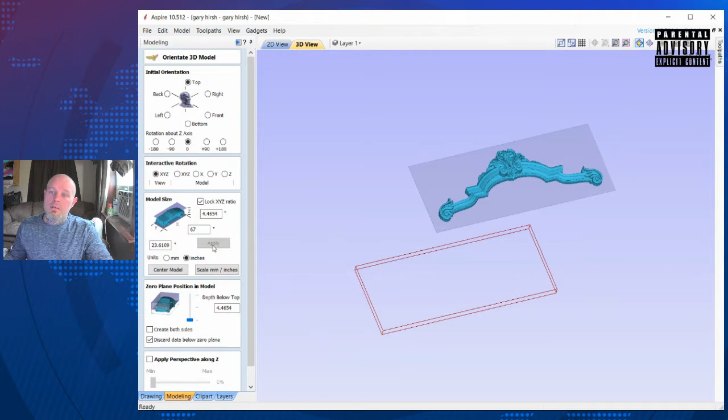For me, I'm going here, I'm going to the door topper. This is actually going to double as the bed topper also on the headboard to tie the room together. So right now it's very big. We're going to go to 5 inches on 5 inches overall, so 67 inches wide. Okay, we're going to center the model. We're going to bring the model completely to the surface, and we're going to click OK. All right. So everything looks pretty good.

Some things to remember with this: I'll be using larger tooling and longer tooling. So I'll have a 1/4 inch 2-flute ball nose end mill that cuts 4.5 inches. The cut depth is 4.5 inches on it. So I'll be able to get down into these design areas more so than what most will. I have an ER20 spindle on my CNC for Newbies 4896 machine, which is what I'll be cutting this on.

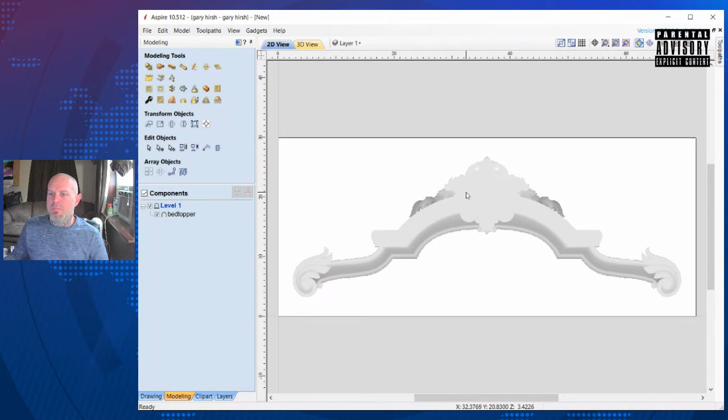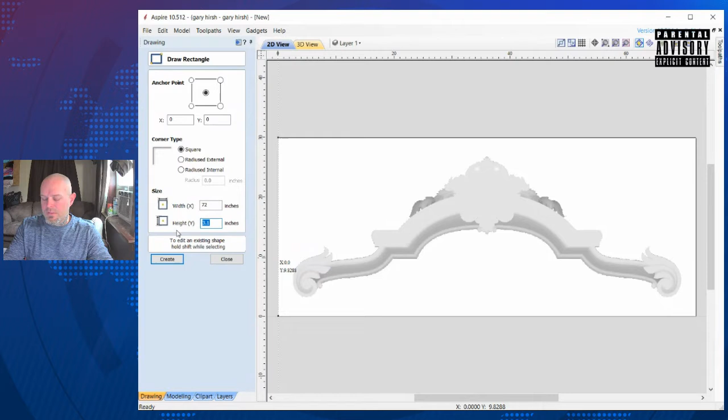So that's that. Okay, so we have our design here. I have it kind of mapped out where I want it. Now I'm going to go here and I'm going to start mapping parts out. So we can go to drawing, rectangle. We can go 0, 0. We'll go a width of 72 and a height of, let's say, 1.5. Create. Nope. We're going to undo that, and we're going to go there and create. Okay.

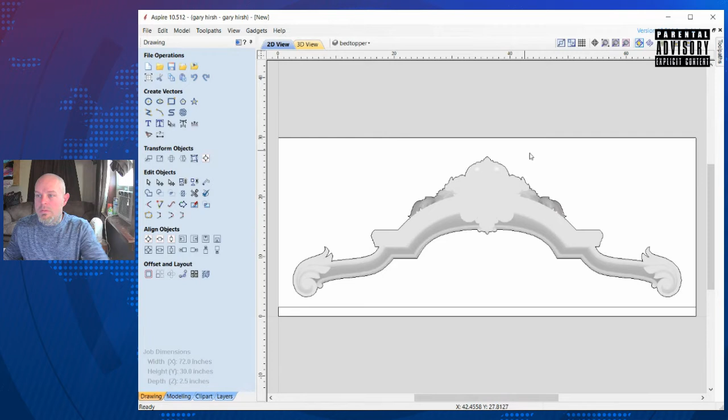Now, with this, I'm going to go back, and I'm actually going to create a vector boundary. Blank that out. We're going to go to drawing. I'm going to ungroup my drawing. Let me blank that out again. Oh. Delete. Delete. Okay. I have just the outside here, which is what I want.

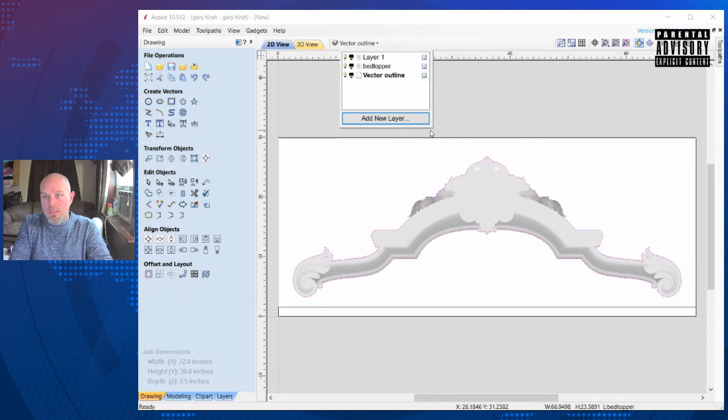Now I'm going to select that. I'm going to add a new layer. Vector outline. Okay. We're going to move to vector outline. Okay. There we go. We're going to rename this as wood blank. Okay. That's blanked out, and that's my vector outline.

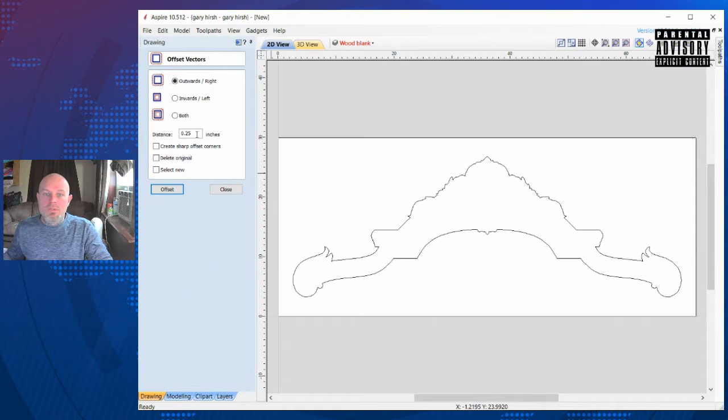So the next thing I want to do with this vector outline is I want to offset it. And I want to offset it outwards using 1/4 inch tooling. We're going to give ourselves a 1/4 inch with that 1/4 inch tooling. So we're going to offset that. Okay, that gives us a little bit of leeway with the tooling. And then I need leeway with the clamping. So I'm going to go 2.5 outwards, and I'm going to go 2.5 off of this one. Close. All right.

So I'm off over here, and I'm not too worried about that for the simple fact that this is no man's land. This is unused wood that I'm actually going to clamp to. Okay. Now I know I'm going to use 2x4s as my base. I'll actually probably use cut down 2x6s to get the depth that I want.

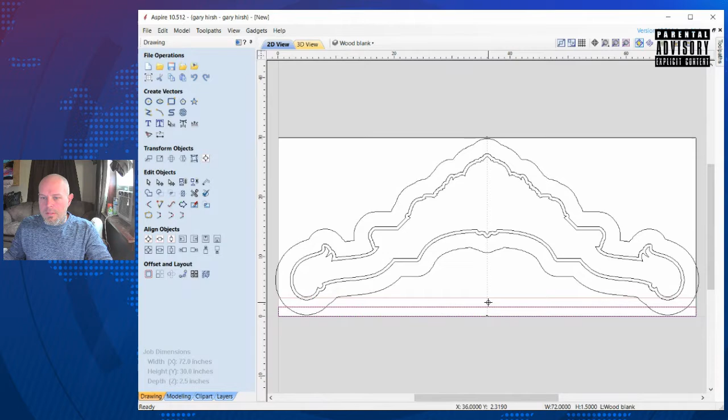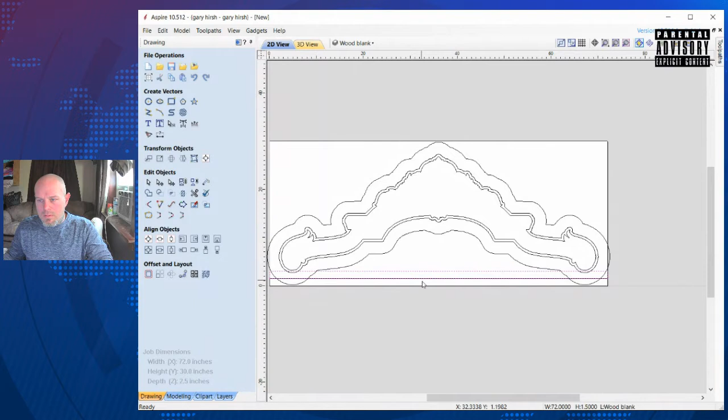So now I'll just go through and I'll move this there. And I'll just keep copying and I'll Control V. Control C, Control V. All right. And what I'm going to keep doing is building this up. And on each area, I'm basically just going to create a box. And I'll show you here in a second.

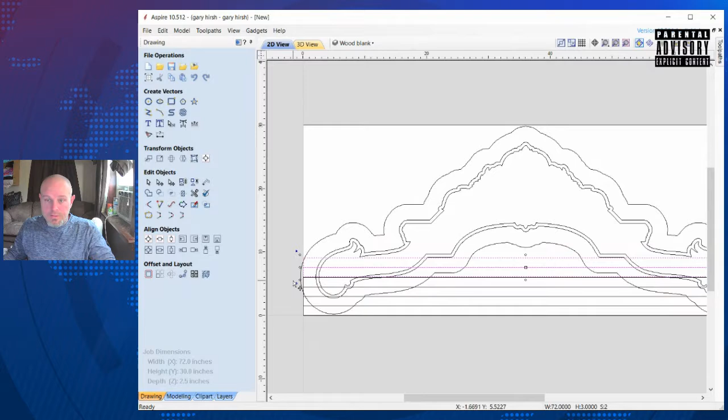All right. So these lines represent my wood that I'm actually going to glue up and surface.

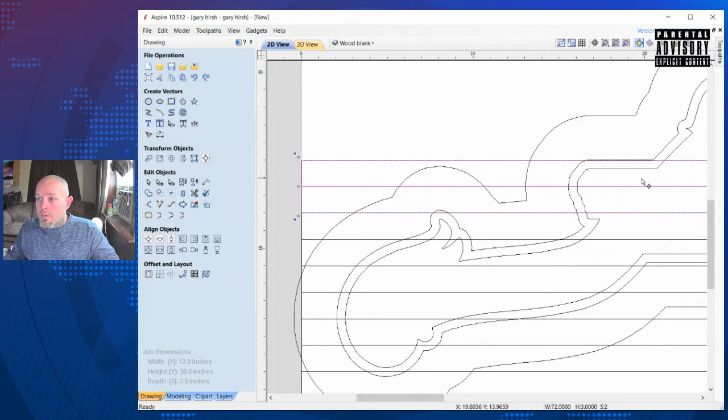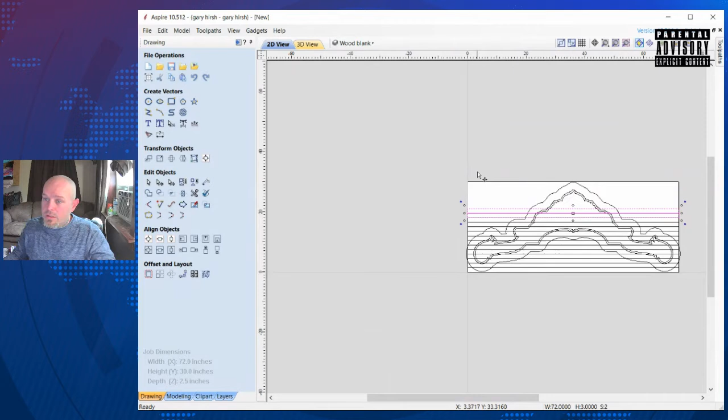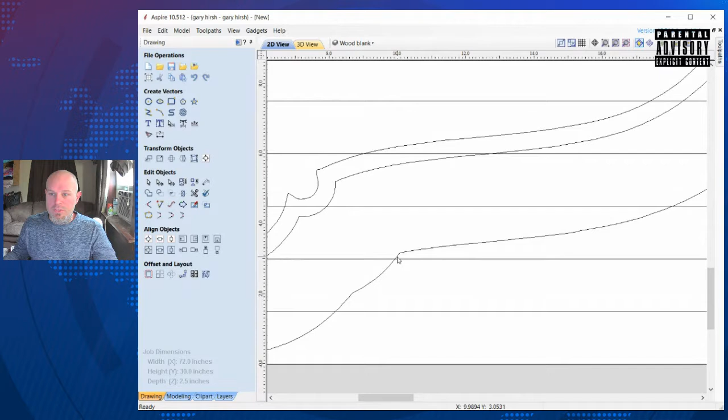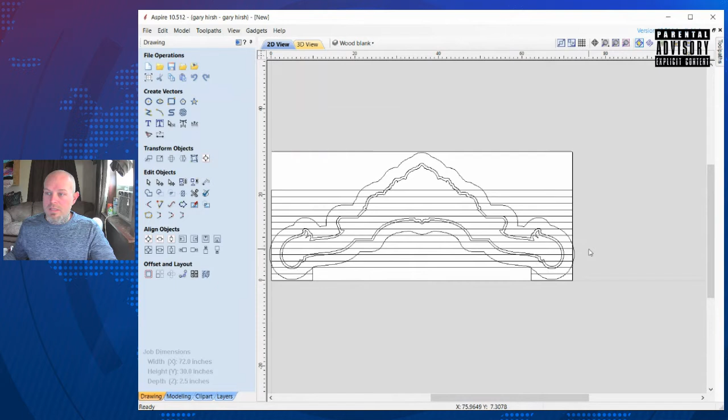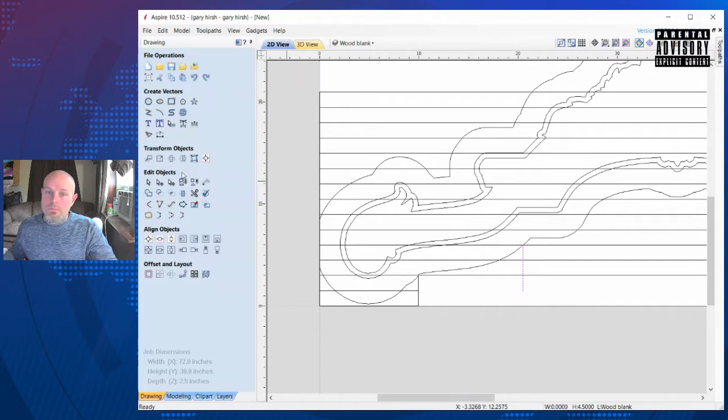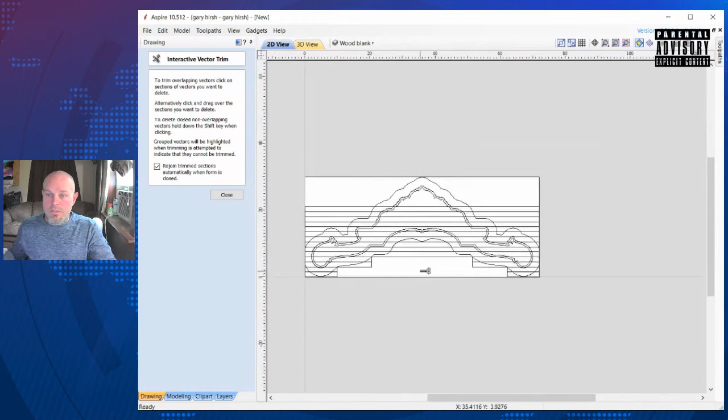And we now have those pieces there. And I'll go through and clip that. Clip that. Okay. Now I'll come down here. And I'll clip that. And I'll repeat over here. And this doesn't have to be real intricate. As you can see, I'm just kind of arbitrarily drawing lines. And I do them 2 stacks just because it's easier for me to keep track of. And I'll go through and clip that and clip that.

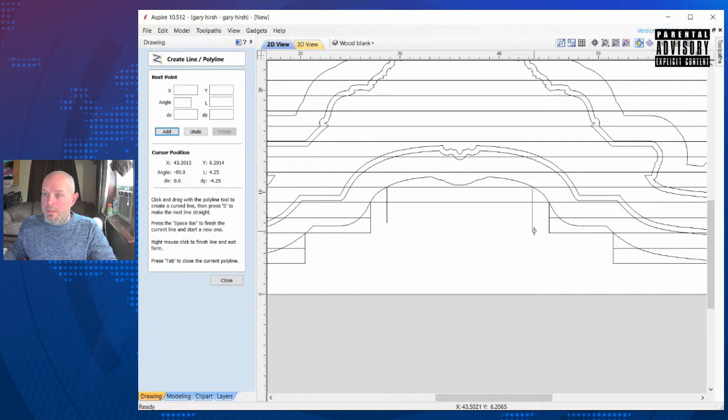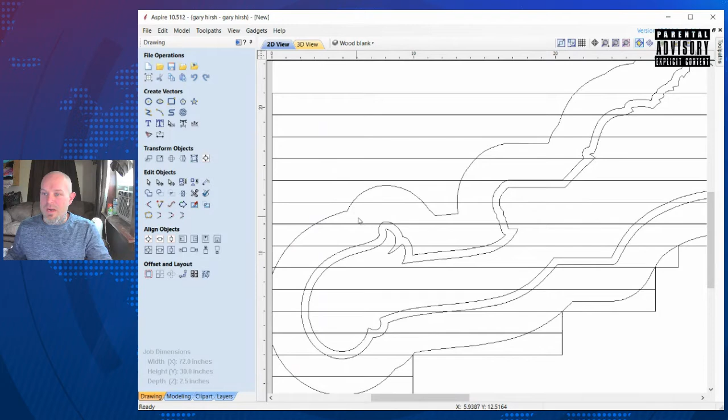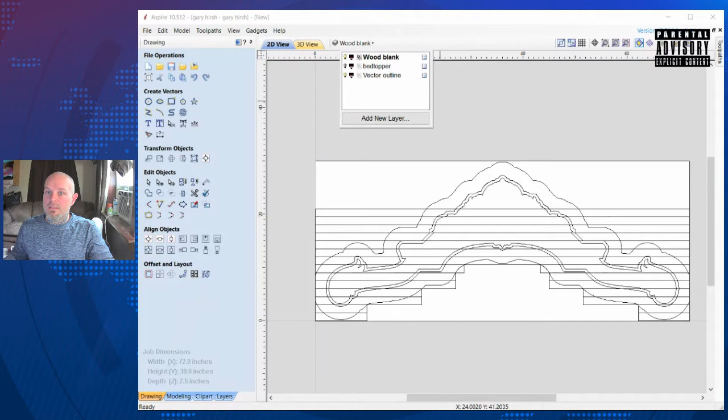Now we're coming into some of this. I'll probably just draw a line here and here. Okay, that gives me enough for that. Okay. Now we start coming up in this area, and I'll start with these lines. That's not bad. That's pretty square. So I can kind of start getting this around if I want. With the price of wood, you know, the more wood you can save, the better off you are. But if I go through and I blank out the vector. Let's see. Okay. Let's take this, this, and this, and move to layer, vector outline.

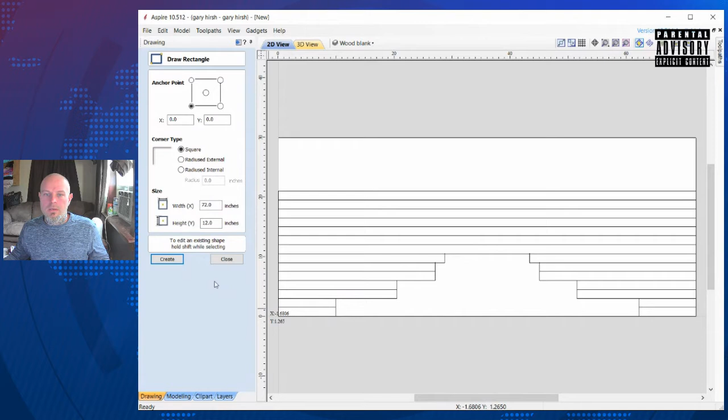Okay. Now you can see my wood blanks, how long they have to be, how many there are, and I can put dimensions to this, and I'll be able to do my glue up as a large panel glue up, but these pieces, my planer's 12 inches wide, so I'll do glue ups that are 12 inches wide, and then I'll run a whole area through. I'll put biscuits on, based off of the planed surface, and then I'll put them together in sections. So if I know I've got a 12-inch wide planer, all right, let's see here. Height 12 inches, create. So I'll be able to do all this in one glue up, and then I'll be able to do another 12-inch section in one glue up.

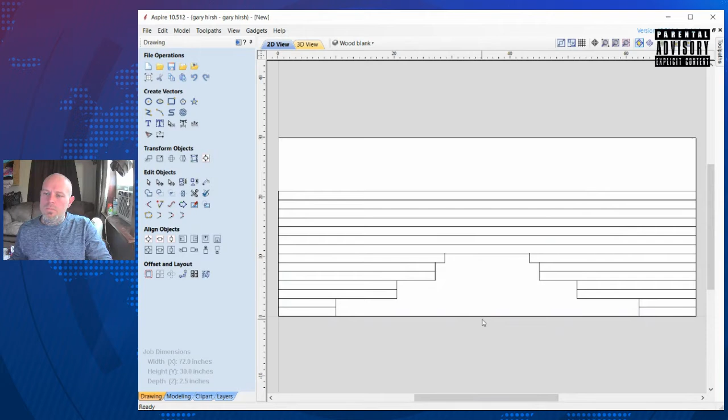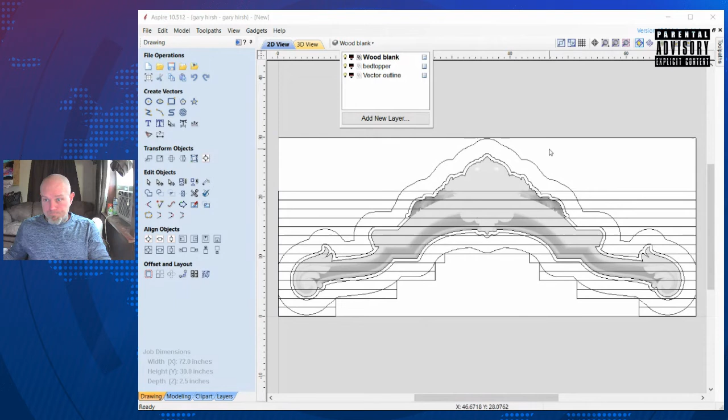And that's how I can break this out, and I'll have enough room here to give myself a perimeter to be able to cut on and do my profile passes. And then I'll be able to have a clamping area. This is all based on trying to find a way to clamp. Okay. This is a pretty intricate part. You know, I don't really have anything major with it. So now I'll just start kind of piecing everything together. So we'll come here. Let's see, we'll come here. We'll do that. We'll do off of that line. So we can clip that, clip that, clip that. Now we can repeat over on this side.

Okay. Okay. That looks good. Now we'll come over here on this one. And we can clip that. Right here, up. All right. Now we can take this over to here and up.

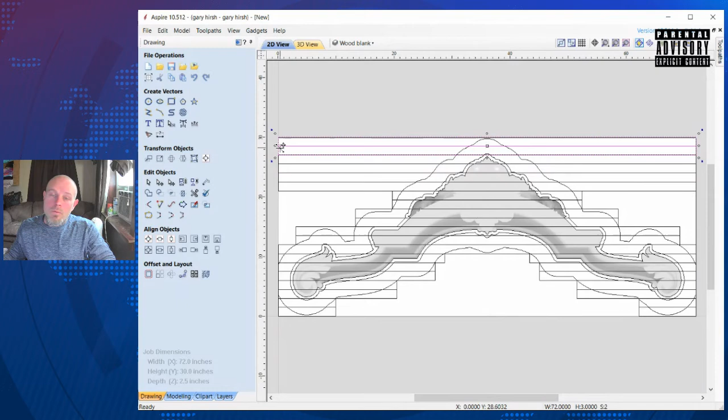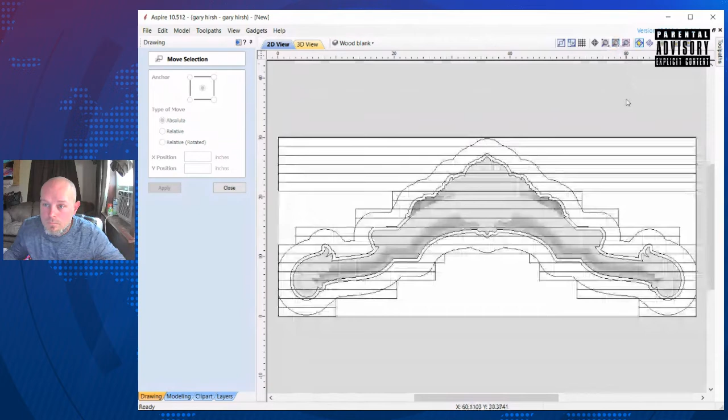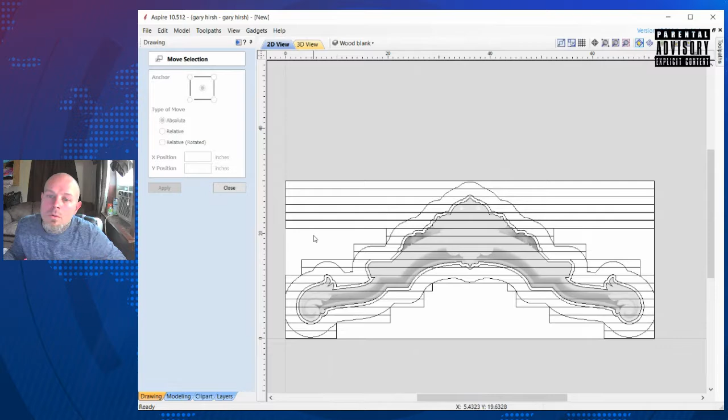Okay. All right. All right. Connect those. And connect those. Okay. All right. All right. I've got some stuff doubled up here. All right. I got to go in and manually move these corners into position. Okay.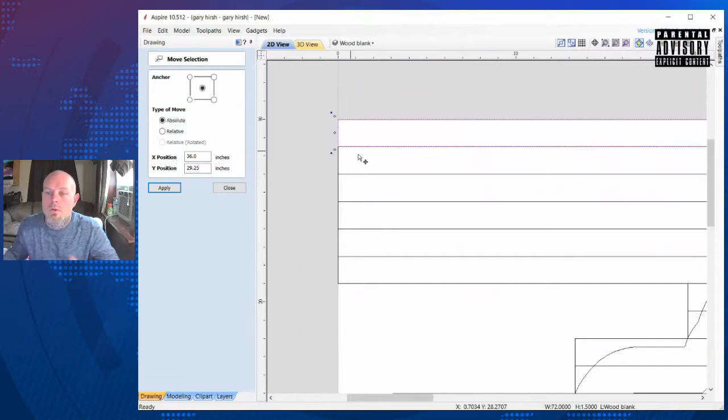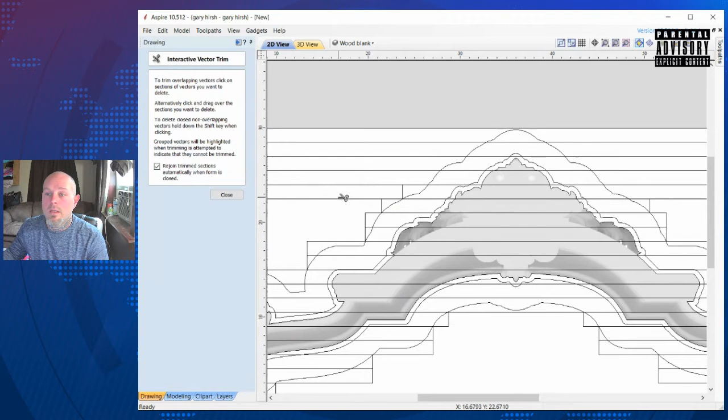So now we have the top of the design, and we'll go with our lines. We can actually do that as one. Do that one as one. And the reason why I'm doing these as ones is because there's so much taper here that I would lose a lot of wood if I did it as a two-piece because of the taper. So by me doing it like this, I'm saving myself a ton of wood and waste, and I can make stuff easier for glue up as I do this. So now we keep going up.

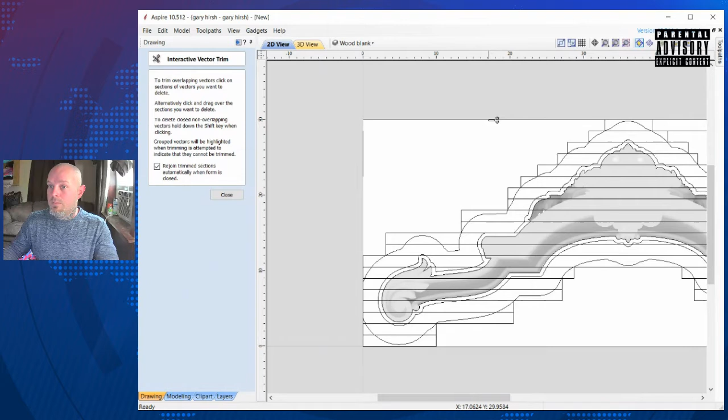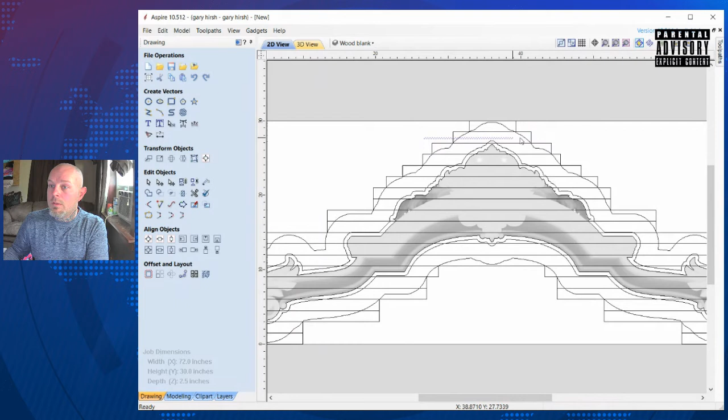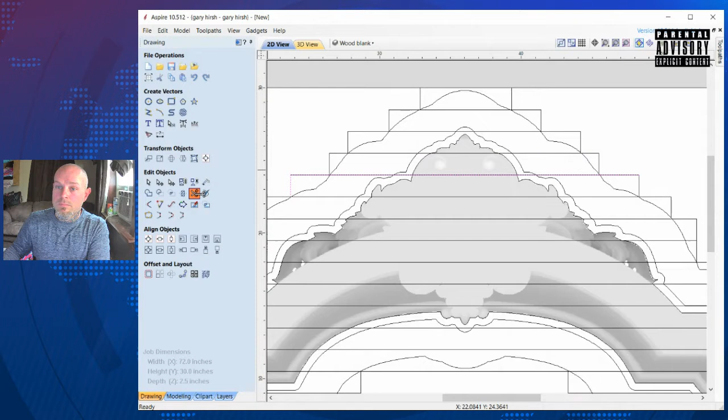All right, so now as I do my glue up, I will actually go through with a... okay. Now I can turn around and give you guys measurements on what is needed for this part. So if I blank that and I blank that, there is my wood glue up as to what size pieces I need.

And let's see what the, okay, Control C, V. So I'm going to do 3 glue ups. One's going to be a very small glue up. One's going to be a medium. One's going to be a large. But in that large, I'm actually going to cut small pieces. So I'll be able to use the offcuts from up in this area to make the actual glue up down in this area.

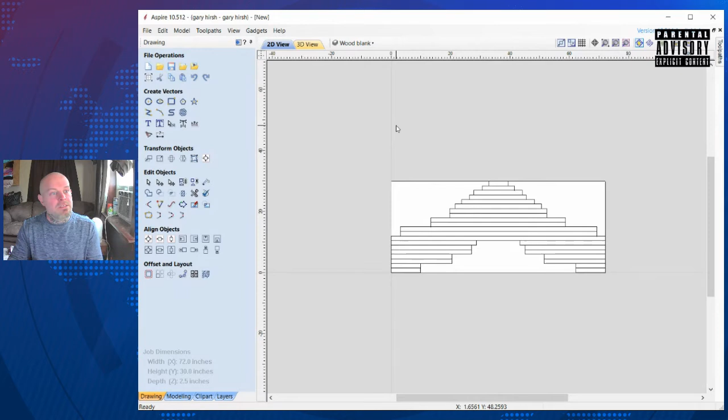All right. And then from there, I'll be able to plane and biscuit everything and get it down to a 2.5 inch blank. And what I'll do is I'll plane it first to probably about 2.75, 2 3/4 inches thick, and then I'll put it on the machine all glued together, and I'll machine 1/8 inch off of each side. So I'll plane the top side nice and flat, and then I'll flip it over to the finished side, and I'll machine that nice and flat.

And what I'll be able to do is then I can put my clamps in, and I can actually tell myself where I'm going to put my clamps whenever I do a big project like this. So by having these outline vectors, I know I can put my clamps in this area, and not have to worry about my spindle or my tooling hitting it. Okay, so my clamps are about 1.25 inches wide and about 6 inches long. So I can go 6 inches by 1.25. I can close that. I can move this right here, copy it.

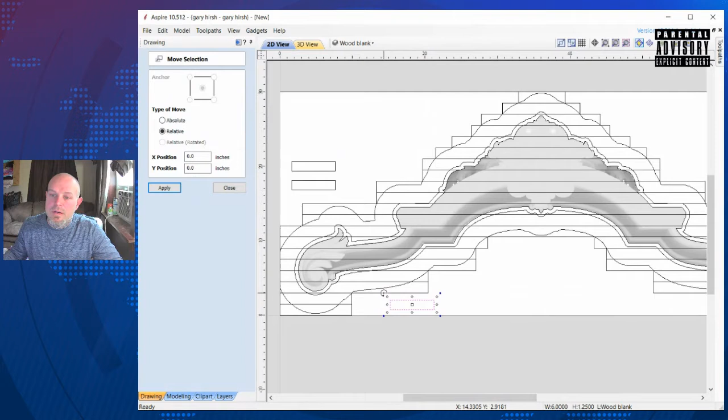Okay, now I can move this, I can rotate it, and I know I'm going to have some clamping right in that area. And my spindle's not going to hit anything in that area. I could probably move my clamp up into there and not have an issue. Okay, same with this. I'm going to bring this up here. Going to rotate it. All right. There. I'm going to put a clamp here. I'm going to rotate it, and I'll be able to move my clamp there and get nice, good clamping force, and know that my spindle is not going to hit any metal or anything like that as long as I program it correctly.

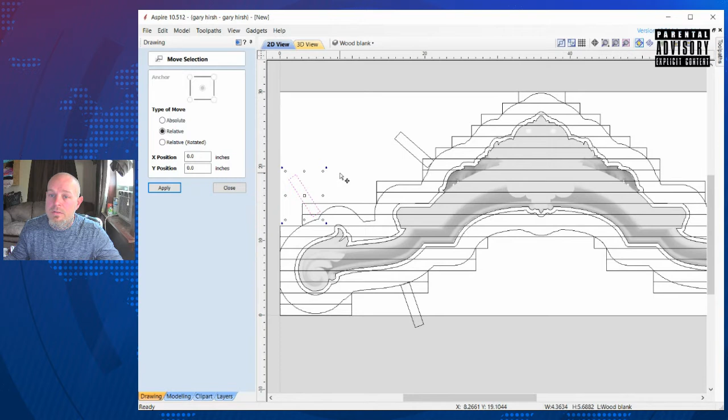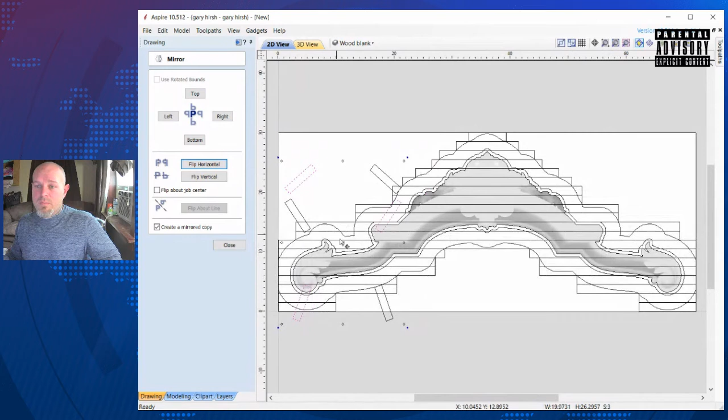And then I have clearance for my outline and everything like that. So now I can make a layout sheet for this on where I'm going to put these clamps. Let's copy those. We'll mirror those, and we'll move them into position right in here. So now I actually have a clamping design also. And I'll be able to tell the machine where to cut and everything, and I won't have to worry about my spindle hitting my clamps or anything of that nature.

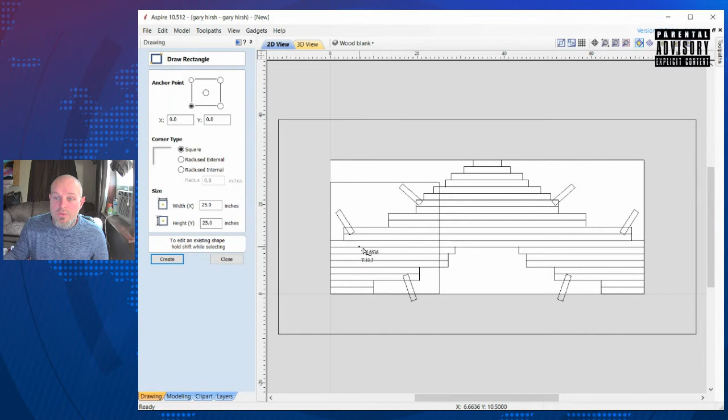Okay, so this is easy because I have a 4896, so this is my table for my CNC. All right, now you guys with the XCarves, maybe you're using VCarve Desktop and an XCarve. You don't have that ability. You have the ability to do a 25 by 25 carve. Okay, so now you can actually break your 3D carve into this section where you 3D carve this part in one section. You then 3D carve this part in one section. And then you'll 3D carve this part in one section.

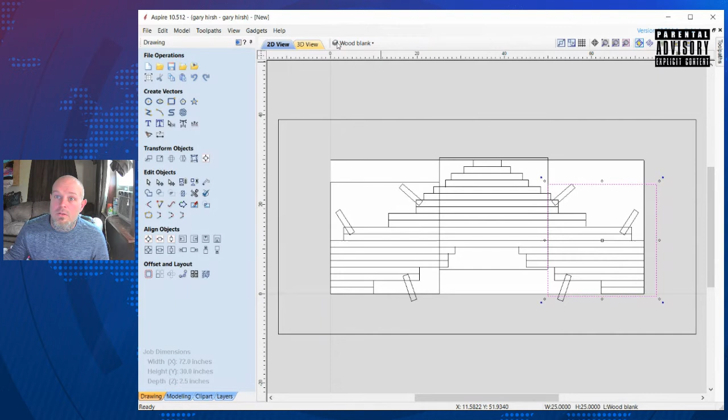And with that, you'll be able to carve this bed topper on an XCarve and then do a glue up. You may have to do a little more finishing work on the seam area right here. You may have to take some time with a hand plane and kind of finesse it into position. But if you do your setup right and you use these setup documents, you can facilitate making very large, intricate carves on an XCarve or a Millright or something of that nature. You know, a Bob's E4 CNC. You can break it into whatever your max table movement is, or what a manageable table is for you, and you can carve all these 3D carves and then glue those 3D carves together. And once you do that, you'll start creating armoire toppers and 3D carved framing and boxing for different applications like that are far bigger than the machine that you're actually running. And that's the cool part.

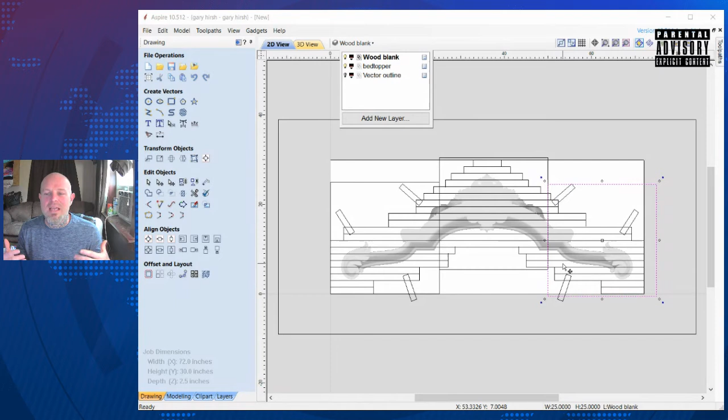So you guys that are doing the CNC for Newbies XCarve upgrade, maybe you're just getting the 500 by 500 XCarve upgrade, okay? And there's nothing wrong with that. You're getting a strong machine frame, and you're learning how to do CNC work. You don't need a huge machine to be able to produce these type of carves. You just have to have the understanding of how you're going to do these carves. For a lot of people, this may seem out of line, but it's really not. You basically just find the center of this wood blank or your 25 by 25, find the center of it and go off of there. And that's how you're going to base your 3D carve.

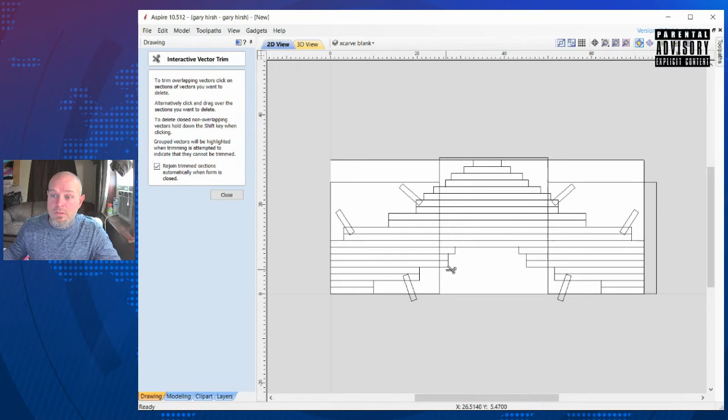Okay, so if I do a copy of this, okay, I know that I can, let's see here. Okay, now I'm done with my CNC for Newbies blank, right? But I know that I only have 25 by 25 with VCarve Desktop and an XCarve. So now all I'll do is I'll go through and I'll clip.

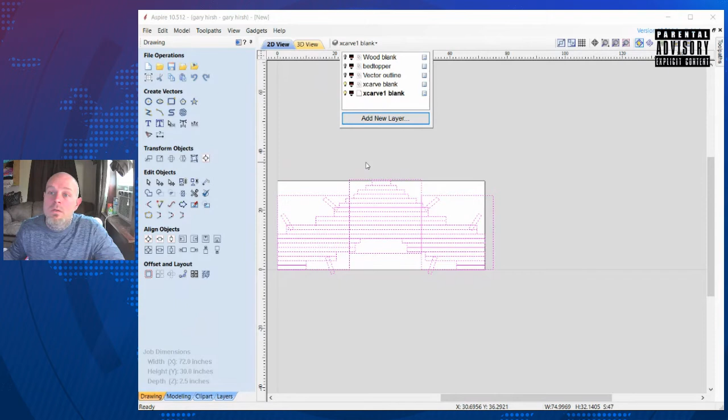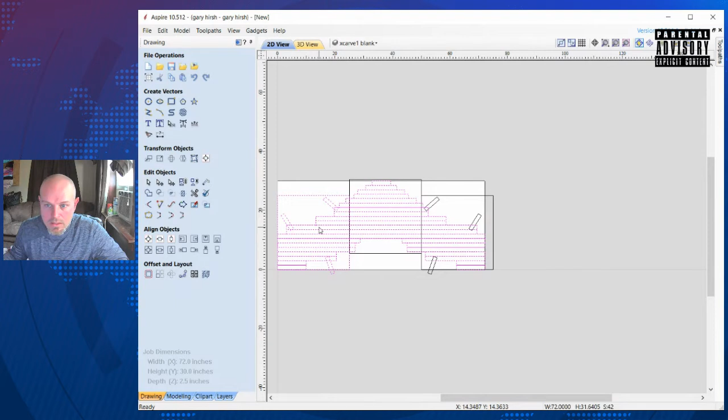There's that. Okay, there's that. So now I'll basically create a new layer, XCarve 1 blank, and I'll take that, I'll unblank that, that. Okay. Now with that all unblanked, I'll go through and I'll copy to layer XCarve 1 blank. I'll blank that out.

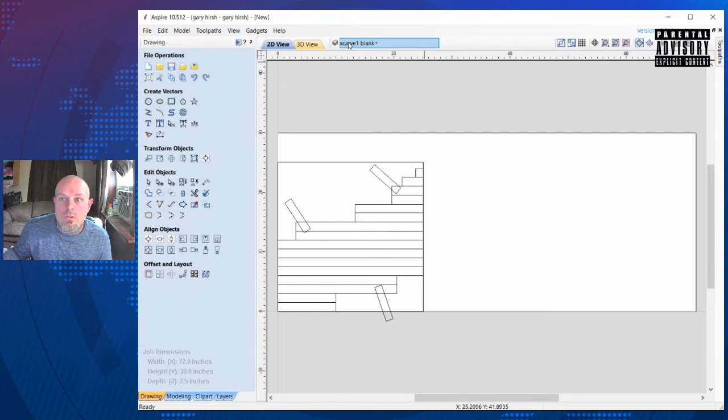And now I can actually dictate what my cut is going to be and where I'm going to clamp. So now if I wanted to, I could dictate that the job size is only 25 by 25. Click OK.

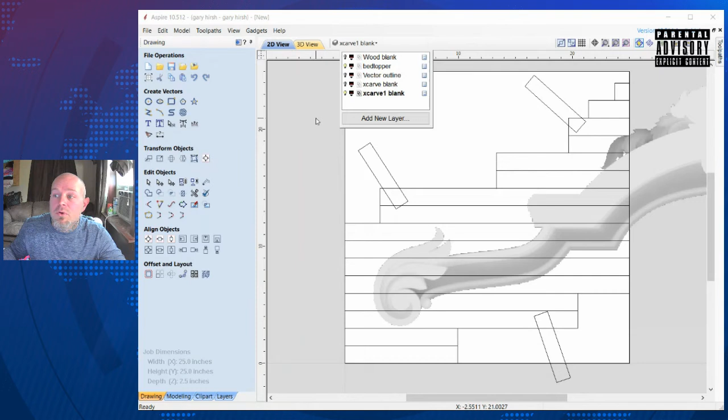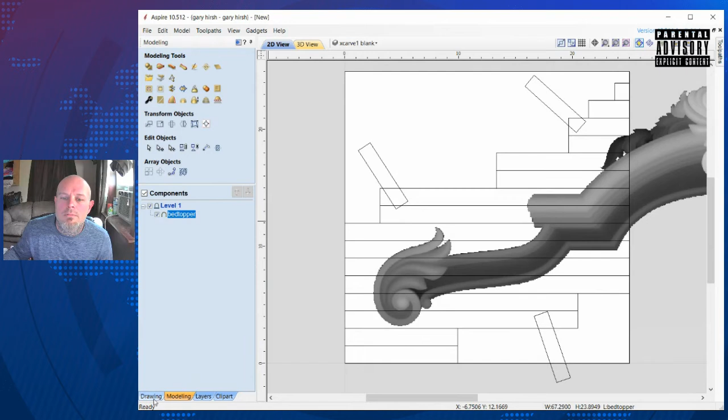Now bring in the bed topper. Go over to tooling. And we're not going to use any gaps or anything like that. Okay. We're going to use... what did I do wrong here? I must not have. All right. All right. There we go. Okay. End mill 1/4 inch.

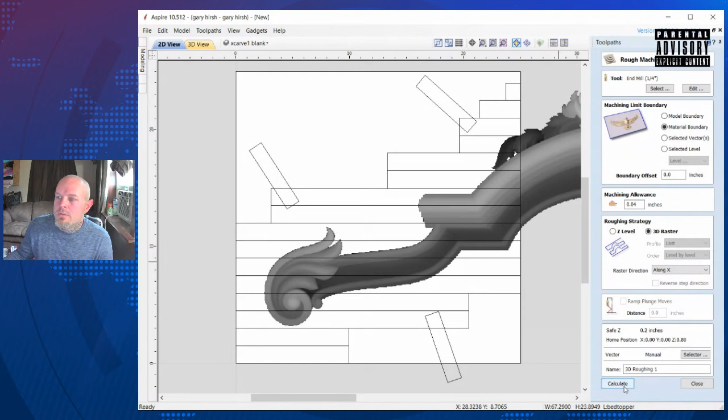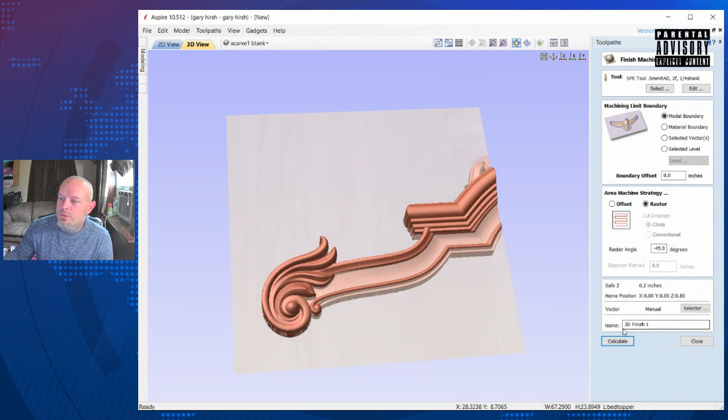We'll go 3D raster. We're going to go with the grain, and I'm going to do a layout like this. So I'll calculate. Okay. Now I'll close that. I'll go to a finish. I'll go to model boundary on this one. And it's going to take a bit because it's such a big carve. It'll probably take 5-10 minutes to do this. I've had them take up to a half hour, and I have a pretty strong processor.

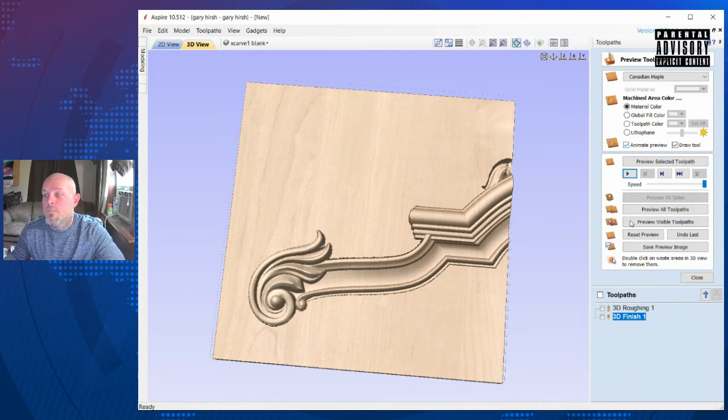Okay. All right. That looks really nice. Now we're going to go here and we'll copy over the profile. And now I'll just take this section, and this section and glue them all together on the layup table. And that's how you can get a topper that is 3D carved off of a small format machine.

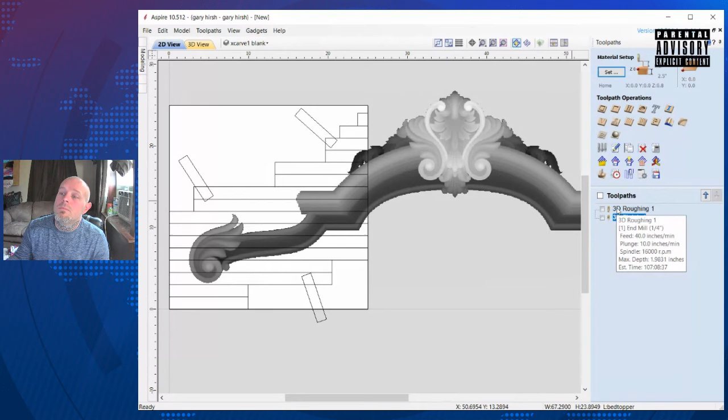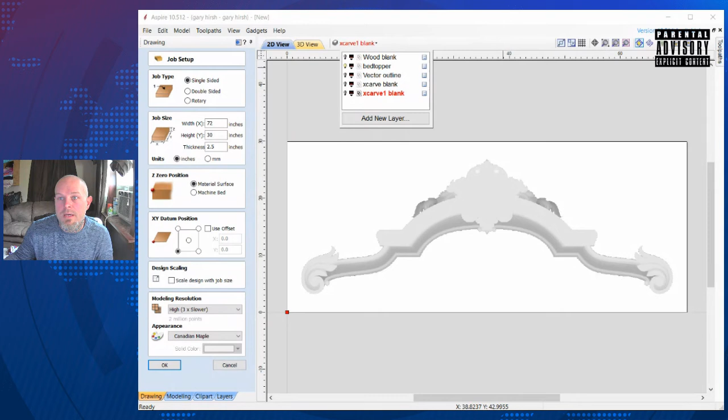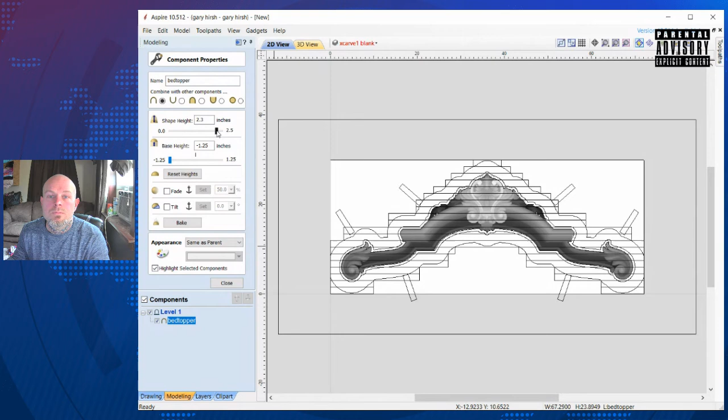Okay. Now if I go back, I go to drawing, I go to job setup, I say it's 72 by 30. Blank that. I keep that. Keep my wood blank. Keep my vector outline. Okay. I don't need those because I'm able to do this all in one setup. Okay. So now I'm going to go to 3D carve. Oh, geez. Go there. Okay. Go okay. And I'm going to go out to selected vector. No offset. A little machining allowance. We'll calculate.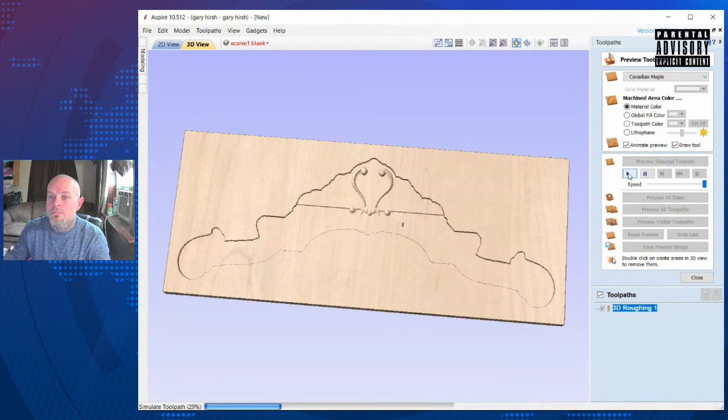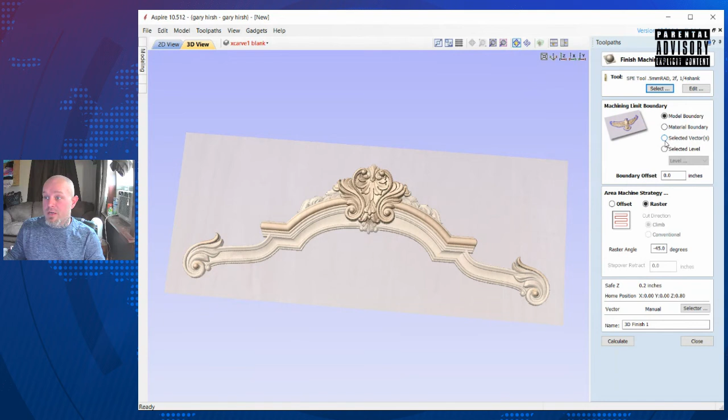All right, now this is if I'm doing it on my CNC for Newbies 4896, which will allow me to carve this whole piece as one, but it'll be a multi-panel glue up. Okay. Now this is where it gets interesting. Let's go out to that selected boundary. All right. We'll calculate that.

Now remember, I would still need to orientate this to my table, so I would actually rotate this 90 degrees. I would position it somewhere on the table so that I can reach the whole area. And I'd probably have some type of alignment lines with the axes movement. So I'll put some type of grid pattern on my actual table, and I'll make sure my table is all flush and surfaced before I do something of this nature.

So there's a lot that goes into a 3D carve like this, and that's why I charge $3,000 to $5,000 for something like this. You know, and you doing it, start off doing some stuff around your house and learn how to do it. And then once you do that, you have it down to a science. You start charging and charge a lot. You can always come down. People bitch when you go back up. That's the way that I see it.

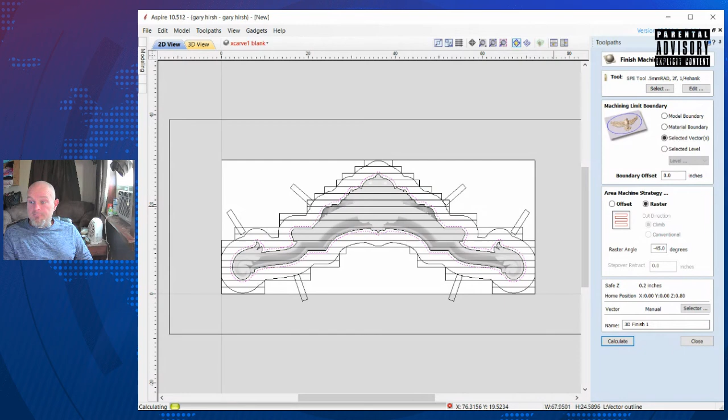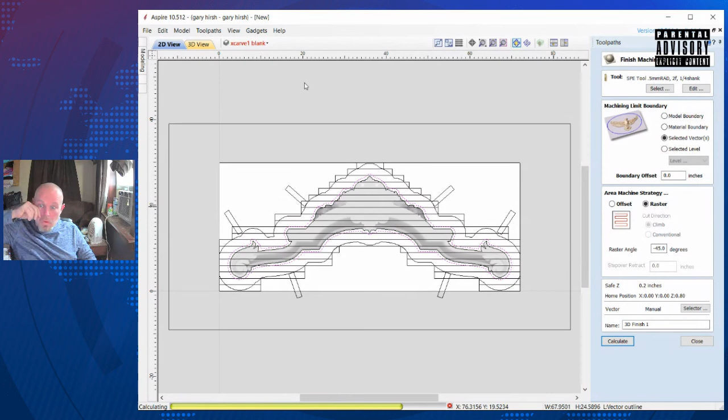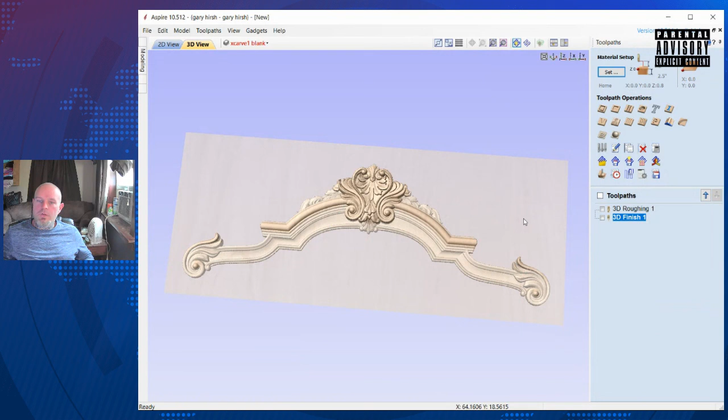Okay, we're processing. Okay, let's take a look at this. That's going to be a beautiful carve. Okay. Now we're going to close that. We're going to go to the profile. We're going to profile this. We're going to go down 2.5. Let's do it. I mean, I'm just playing around at this point. Conventional. Definitely do a separate last pass. 0.005.

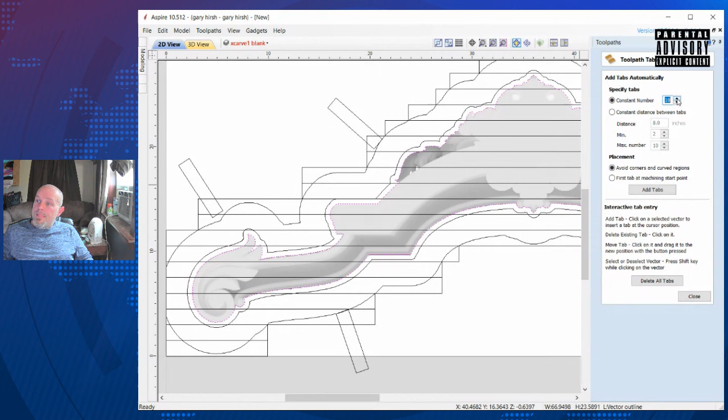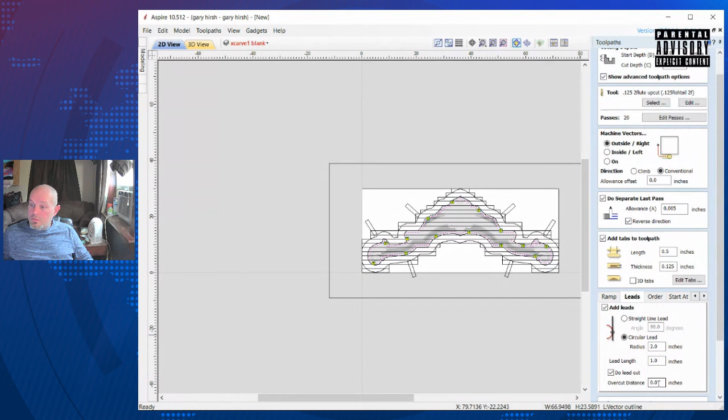Let's do it reverse. Let's add some tabs. Let's add tabs. That looks good. Once we add the tabs, we're definitely going to add ramp ins, smooth, lead in. We'll add circular lead ins, 2-inch radius, do lead outs, overcut distance 0.02. And we'll go to calculate.

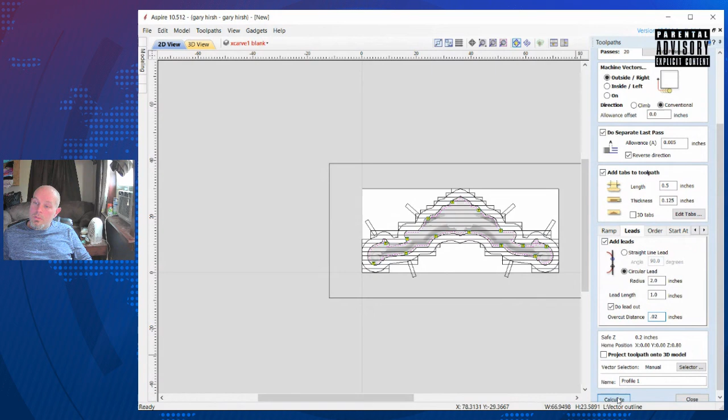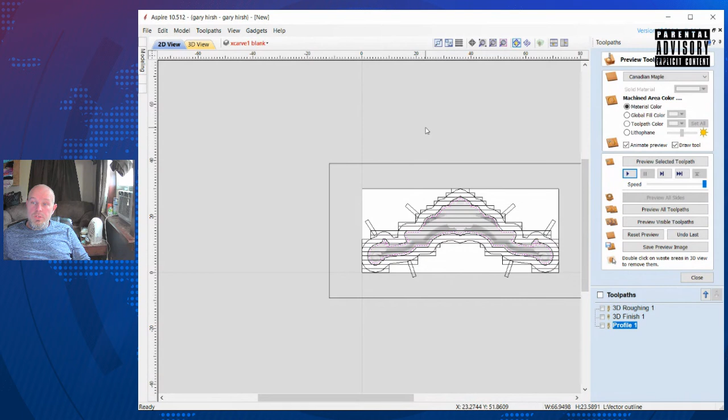And as you can see, that's where we're going to be at. There's our tabs holding everything, very little cleanup work, and it's ready to go. You can see our cuts. You can see how much wood we saved. And when you do something of this nature, you can cut a lot of cost or up your profit a lot by doing something like this and not having to worry about running your spindle into clamps or anything like that.